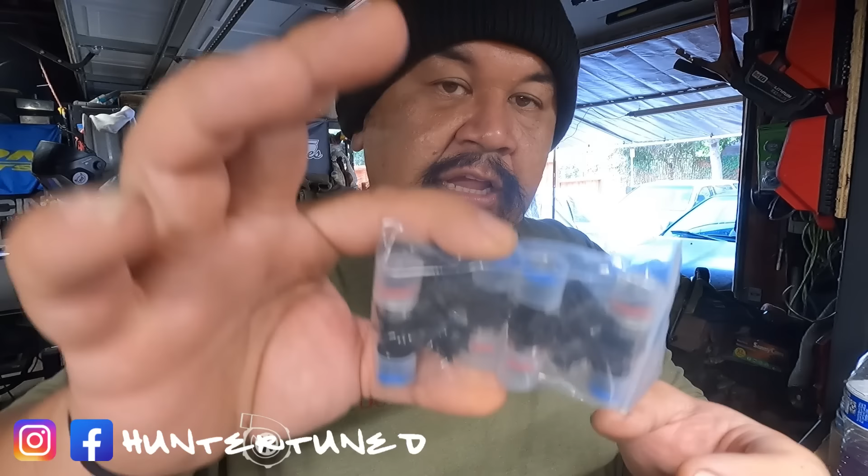Inside here we have 2 sets of injectors, for the EK Turbo Coupe and also the 88 Silver Sedan. The first set is the new mid-grade injectors, they're shorties, and Hunter also offers top hats for them, this is for the 88 Silver Sedan. Then we have the budget 1000cc injectors, which we've used before, and he also threw in the plug and play adapter kit for the harness so we don't have to hack any wiring.

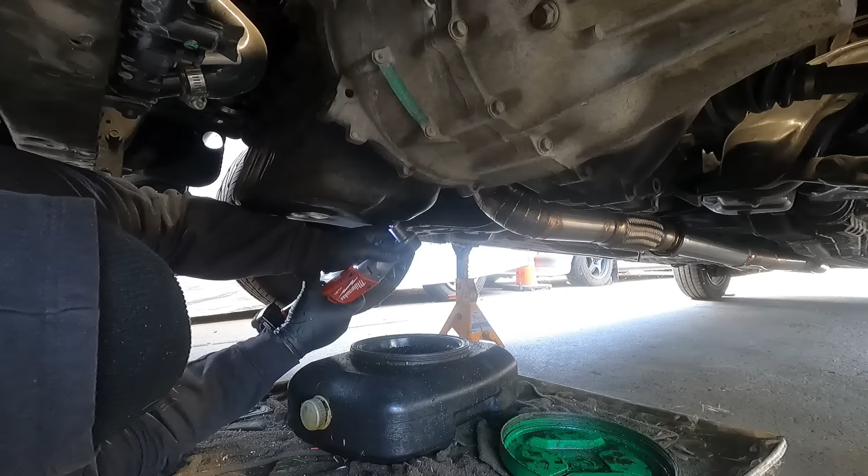Let's go ahead and jack up this car so we can get cracking. I'm going to change the oil first. I did warm up the car to heat up the oil a little so it drains easier.

Oh boy, this thing is dark.

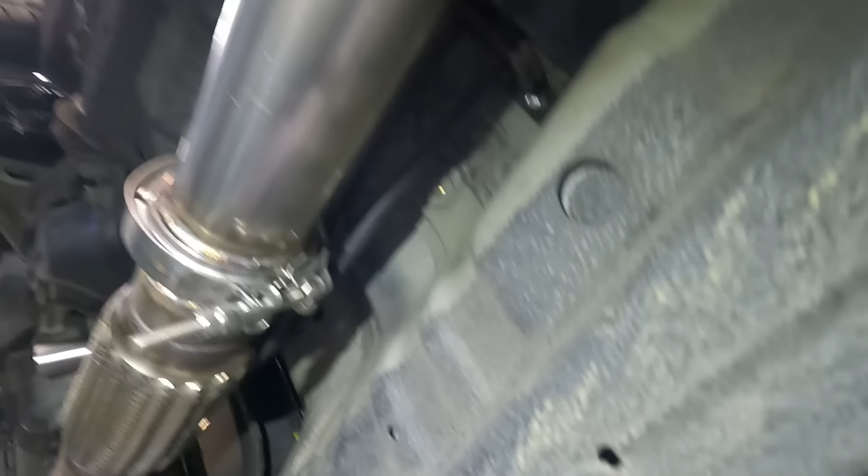Let me grab some zip ties real quick. While the oil is draining, I noticed the shift cables are pretty close to the downpipe, so I want to move them out of the way. I don't know if you guys can see it, the cables. The shifter box is mounted under the car, which brings it really low, and it sits right on top of the flex pipe. So I've got to pull that out of the way. I put a zip tie on the cable and pulled it up into the car just to hold it away from the exhaust, because there's literally no mounting points down here at all.

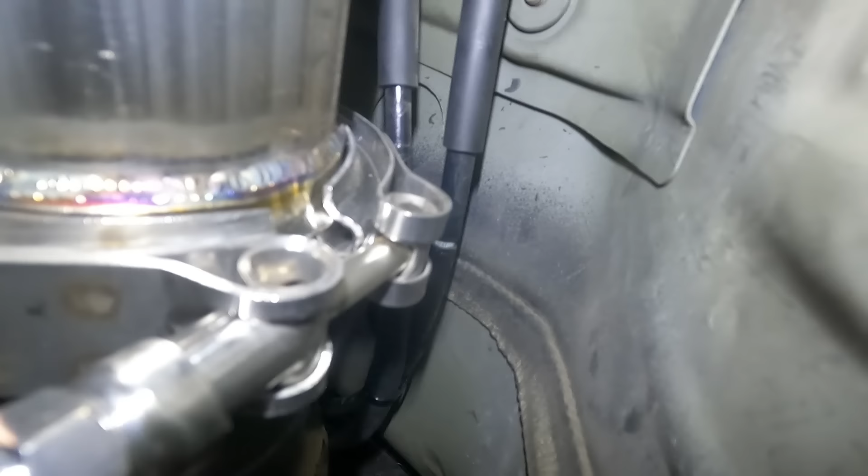Hopefully that'll work. I also noticed his cables are all broken on the sleeves. If you guys remember, when I broke my sleeves on the cable in the blue all-wheel drive car in Bakersfield, the shifts were super hyper extended.

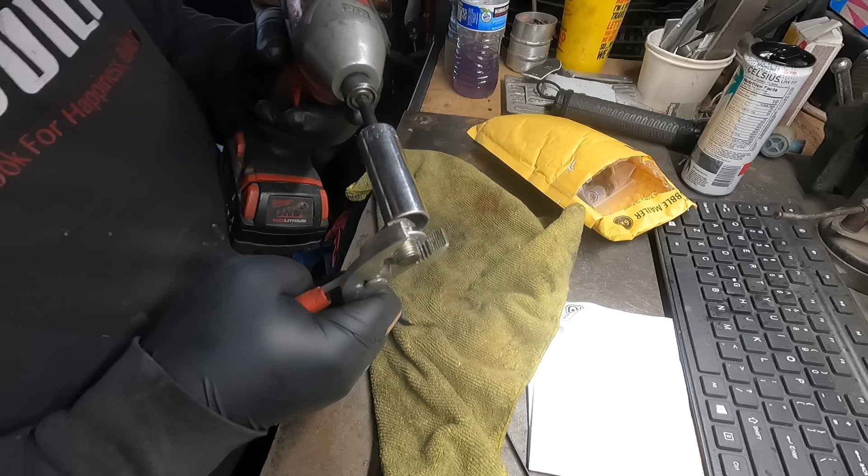Damn, this thing was shot in there or something. You guys see that bulge?

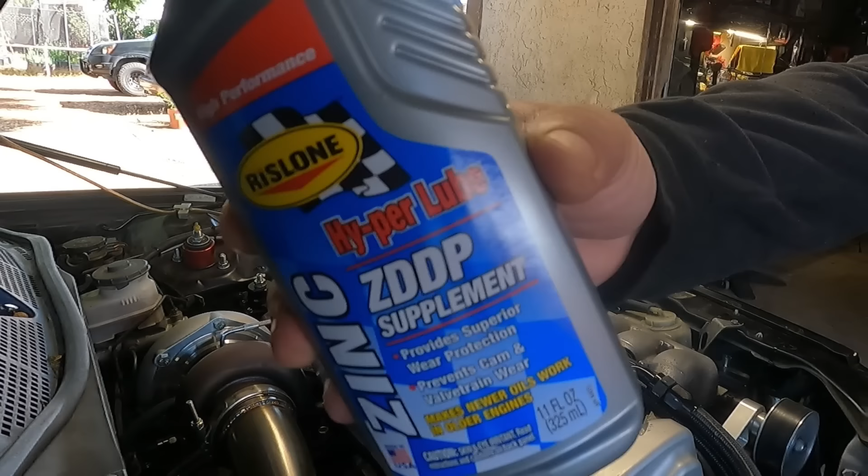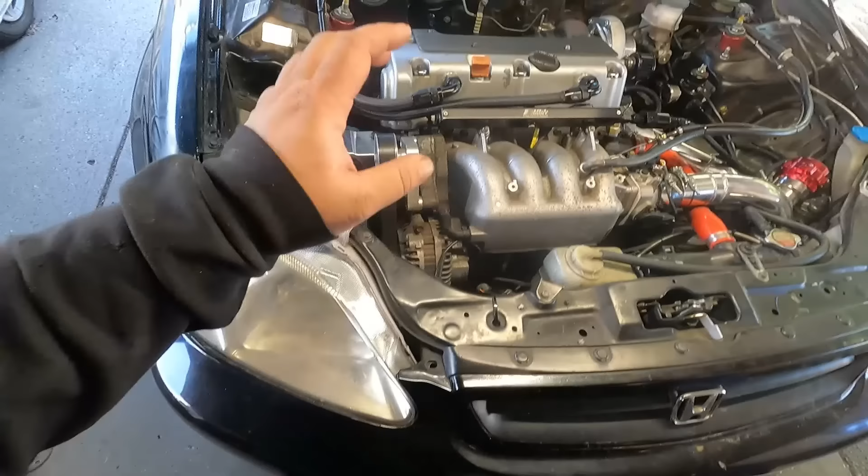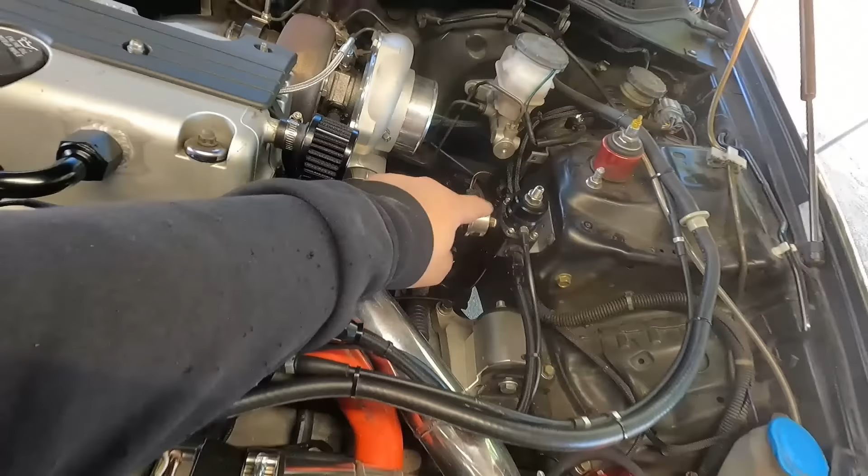New filter and oil has been changed. Before I turn on the car to cycle the oil, I'm gonna build a return line for the fuel pressure regulator, because we're gonna be draining out the 87 gas out of here, and then we're probably gonna put that into my mom's car, and then go get some fresh 91 for this car before I drive it to the dyno.

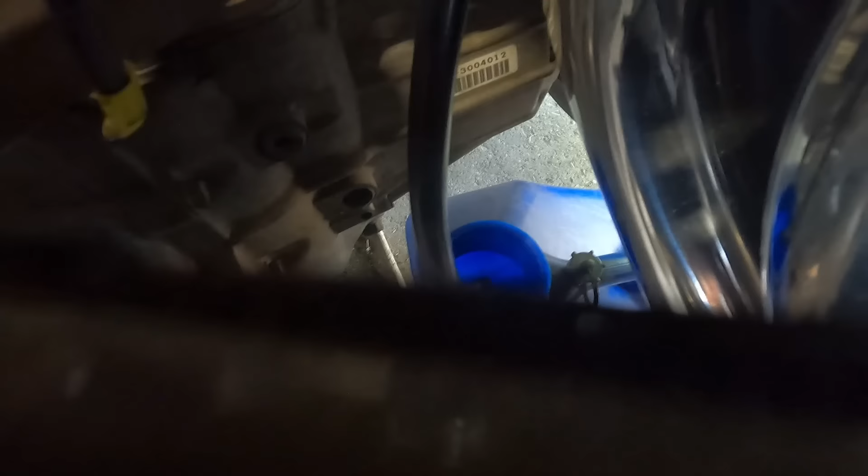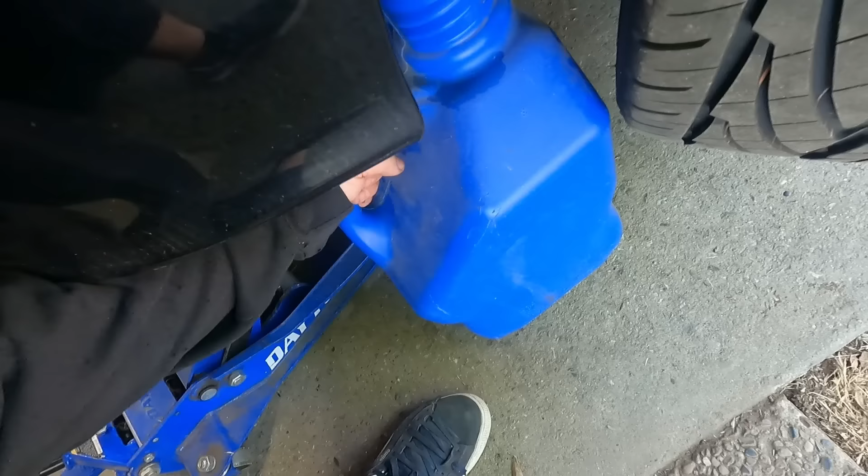All right, here is the first run. We're a little under half tank. The car just died off, and I think we're way past the E.

Cluster is about 10 miles an hour off. On the cluster, I'm doing 80, but on the Speedo app, I'm doing 70. But even at 70 miles an hour, this car is not that loud, and I'm very stoked about it. Very bearable.

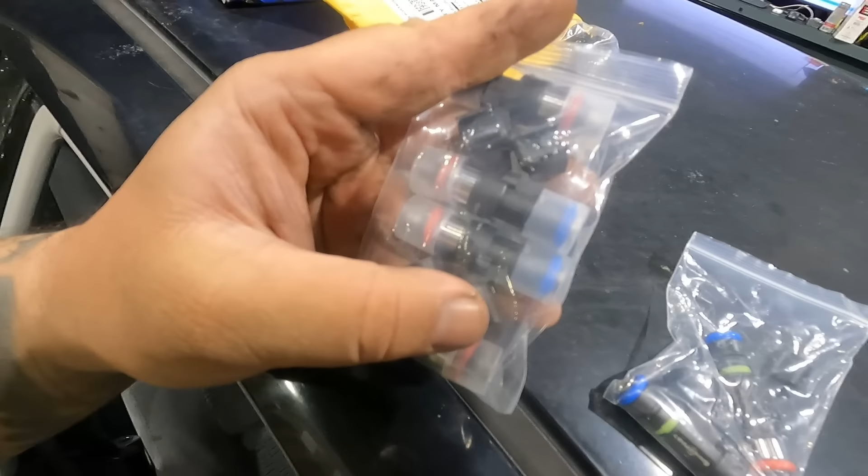So it seems like everything is within each other, and I'm gonna leave that inside the car for Guy, because he's gonna have to dial that to the map with the 4-bar map sensor. So the shorties are gonna go back into the bag with the top hats right here, and we're gonna be using these shorty adapters, which eliminate a bunch of extra wiring. These little ones just clip on top of the injectors, and the harness just plugs on top of that. So let's go ahead and get this thing installed into the fuel rail.

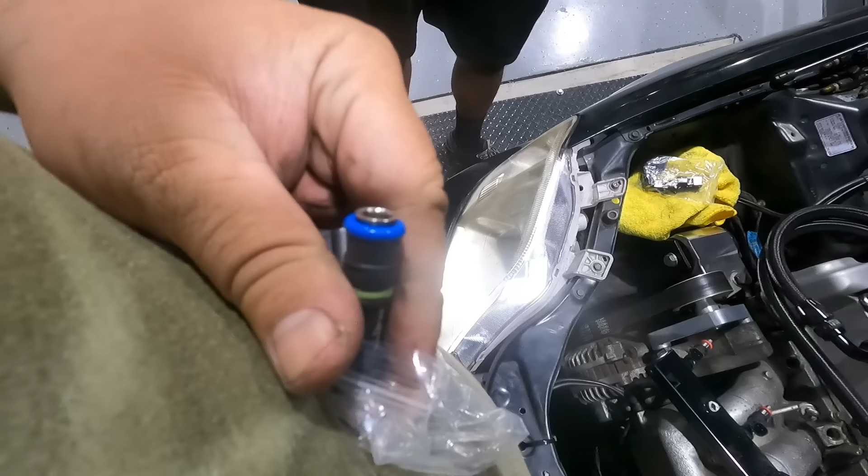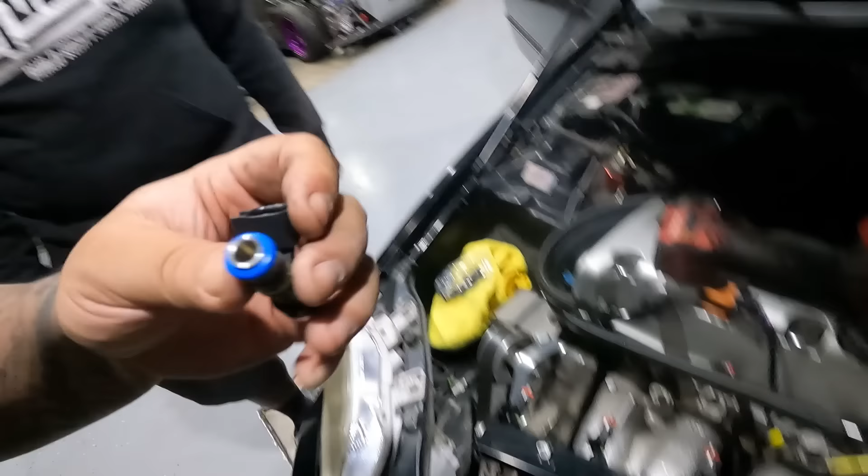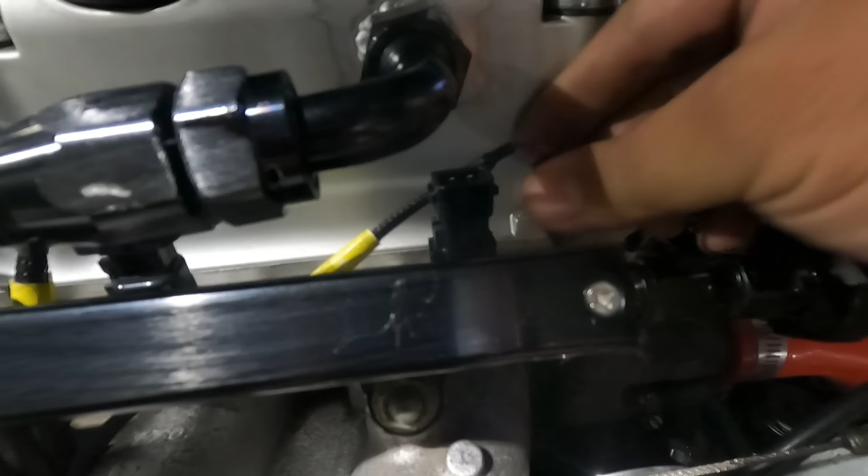So this is how you lube up these O-rings to get them onto the fuel rail, right? I can taste Hunter's fingers on these. Hunter also has these in stock on his website. Literally plug and play, right? Yes, sir.

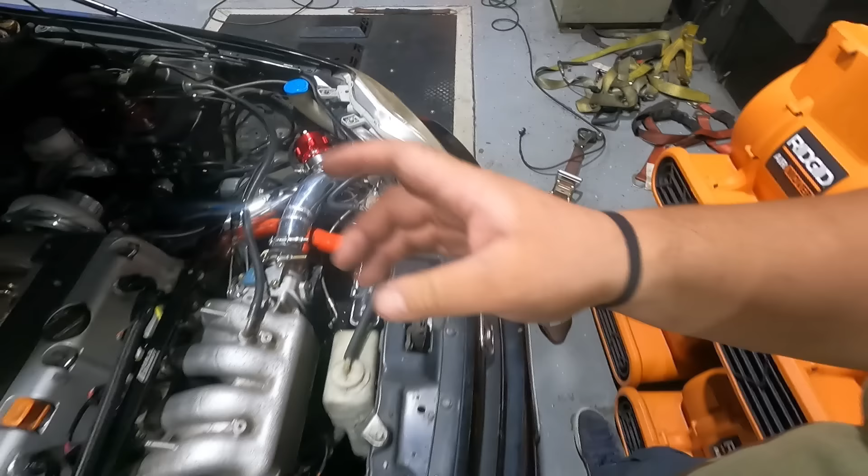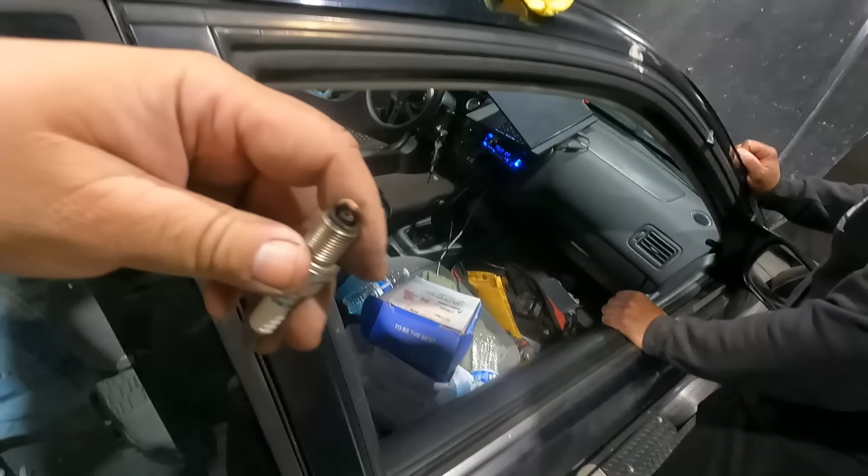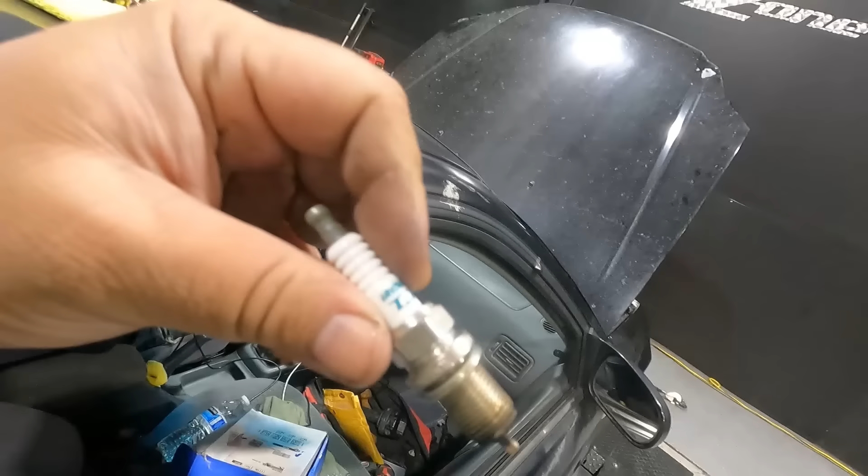So what the car was doing was, when it got into like 4,000 RPMs, around 4,200, it was doing like an AK-47 two-step sounding thing, and we were trying to figure out what was going on. The ECU wasn't data logging. There's a bunch of little stuff going on, and then we took out the spark plugs just to check it out. These aren't the plugs you're supposed to run with a turbo setup, but we just wanted to run it for the baseline pull.

So we just swapped these out to the NGK2668, got that gapped, and let's see if it changes the drivability.

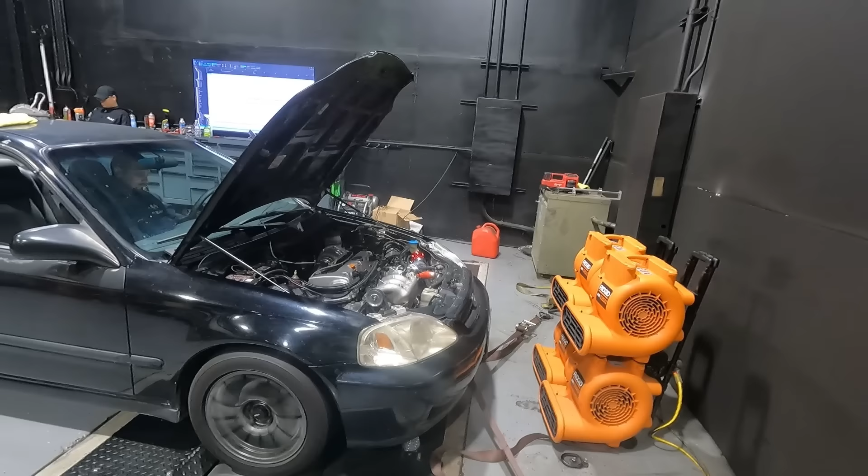So we've been trying to figure out this hiccup issue. Let me see if I can try to pick it up for you guys. Okay, it sounded a little bit better.

Earlier at around 4,200, it was doing some crazy AK-47 action. And what was going on is that the VTEC coming in, wherever the factory had it set, combined with the GT35 pulling all the air in. This is an EP3 motor with 2 lobes, so the motor is congested with a lot of air, and it was having a hard time coming out.

So Guy dropped the VTEC down to like 38, and it was finally able to rev out, but now it's starting to do that at a higher RPM. So Guy and Nomis have been trying to figure out what's going on with it and try to get this thing dialed in a little bit.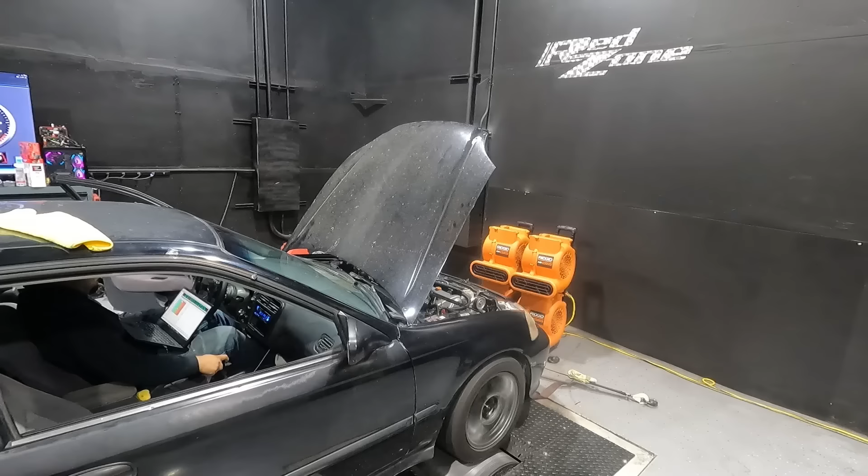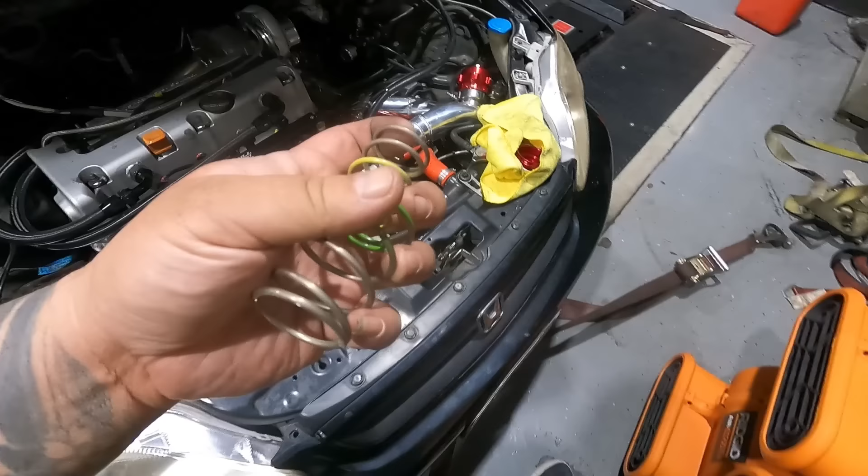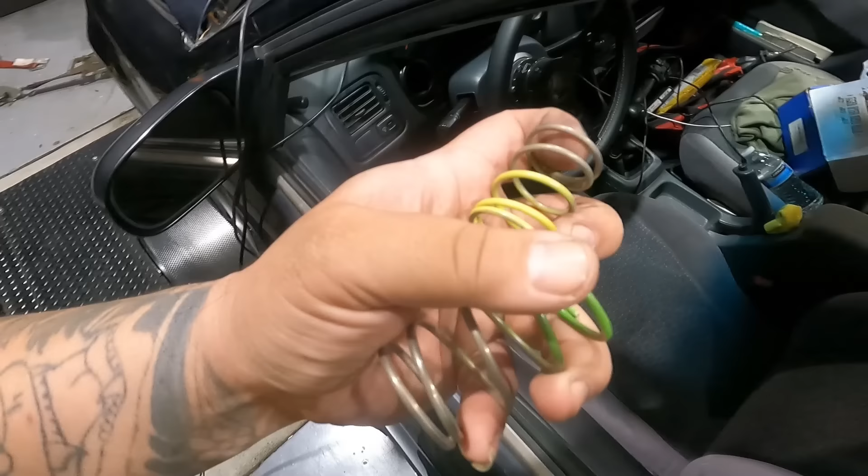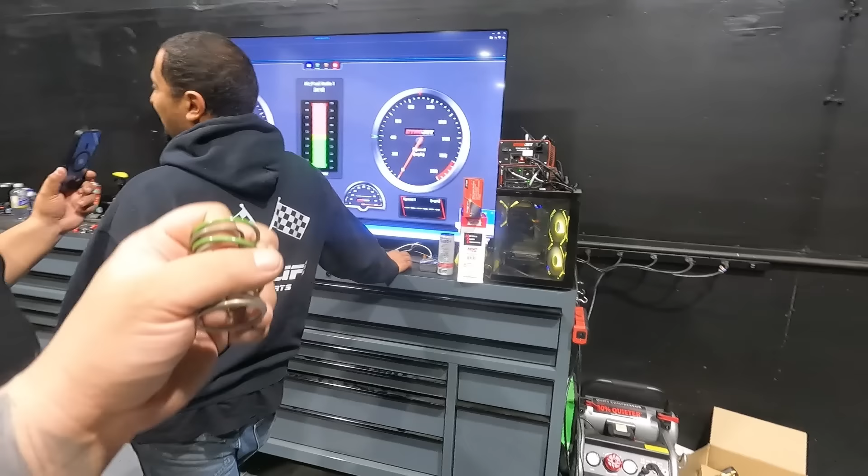The car is only making 3.7 pounds, and I had a 7-pound spring in here. What we're thinking is that the car is having some sort of back pressure issue. So Guy told me to put the second spring in it to make it the 12-pound that we originally had it at, to see if more boost can force out that back pressure, whatever the car is currently doing. It didn't make a bunch of power. It made like 187. So we're just ironing everything out right now.

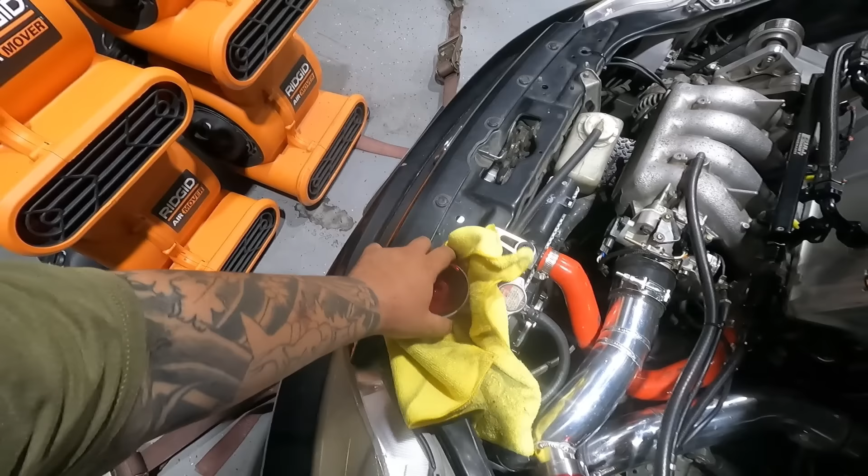So I'm gonna go ahead and put this thing back on. Shout out to Turbosmart, because it's as simple as this locking collar right here versus all the little screws like some of the other brands you guys have seen before. Right now I just need a second pair of hands to kind of push down the 12-pound to lock the sucker back on, and we should be ready to rock and roll.

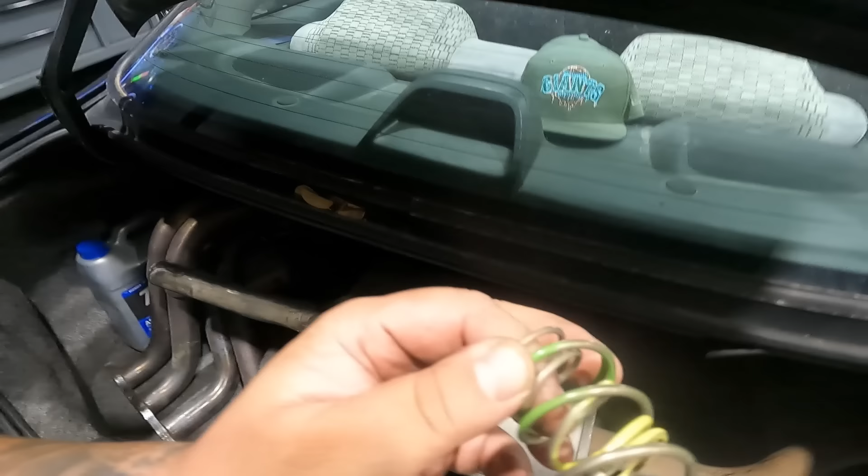Okay, we were supposed to put the 12-pound spring in it, but the box had a single blue spring which was thicker, so Guy told me to just put the blue one in it. We'll see what it does.

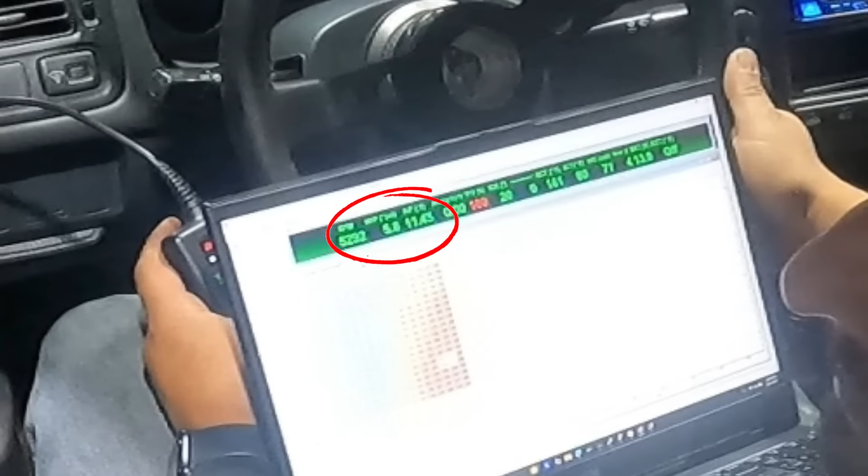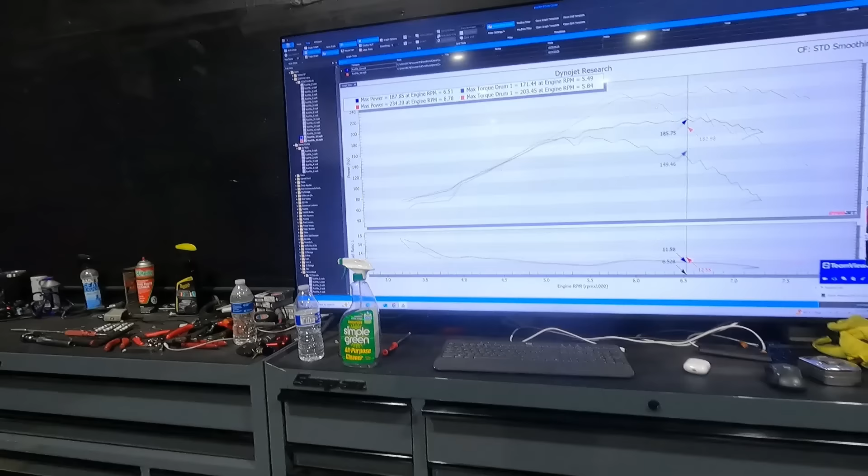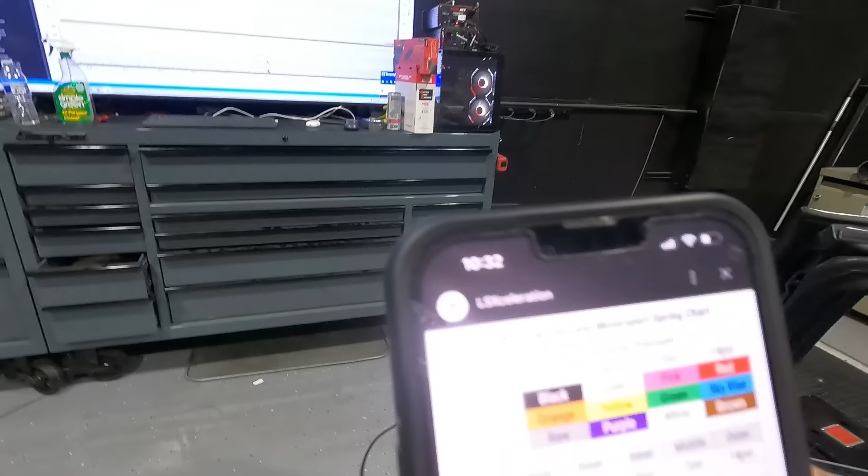Okay, so that spring did 7 pounds. It made 234. It's definitely moving somewhere, but that's odd that it only made 7 pounds. So I don't know if that's like a back pressure problem or... Look at this, guys. Sky blue spring for the HyperGate45 is 14 pound, but it only made 7. Interesting. Okay, see the squiggly line at the back right here?

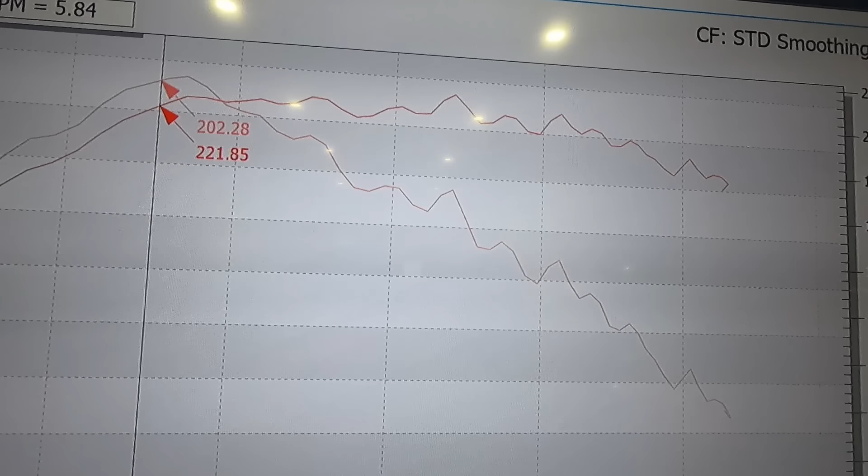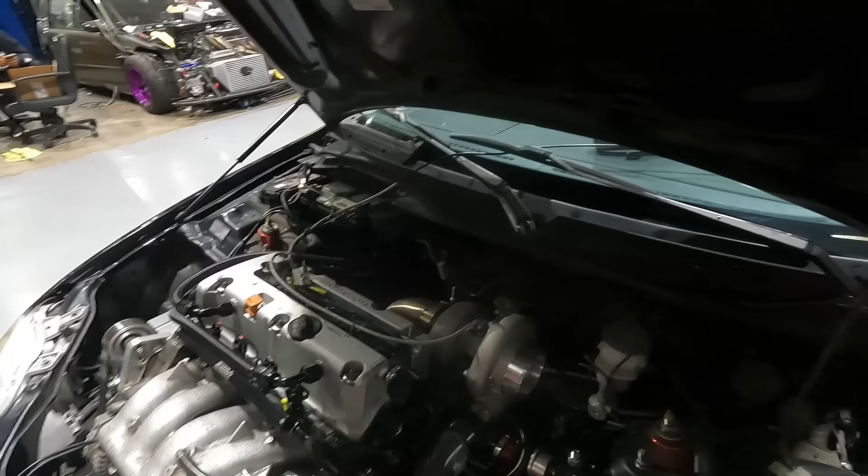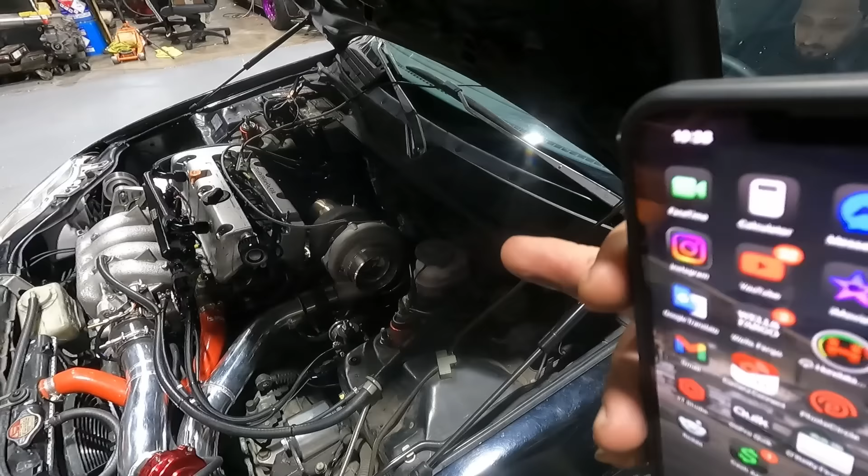We're thinking that this has something to do with possibly valve floating right here, because this is an EP3 engine that only has the 2 lobes, so it's not relieving. And we're still thinking this thing has a lot of back pressure issue, because we put a 7 pound spring in here and it only made 3.4, and then we put a 1 bar 14 pound spring, and on that pull it only made 7. So they're explaining to me the ratio of the pressure, because this manifold has wastegate priority for the turbo setup. So let me show you guys real quick.

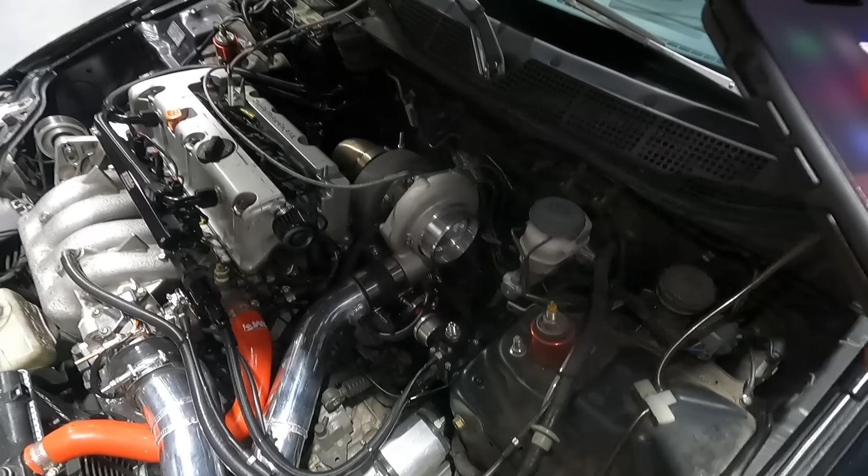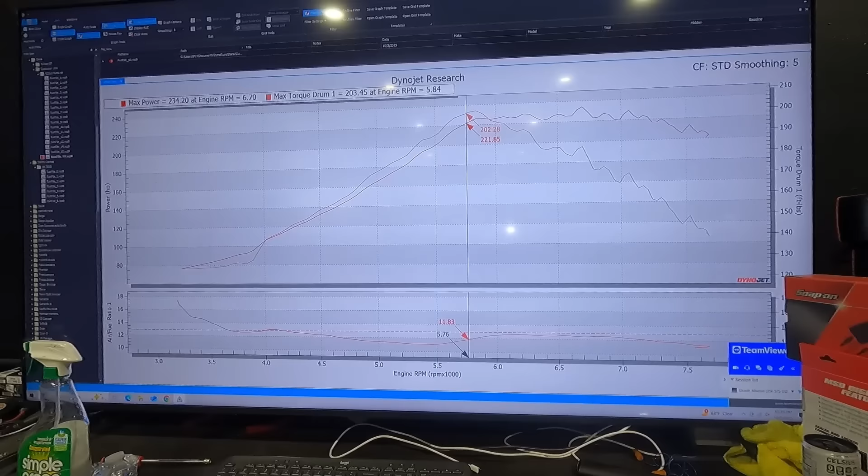So this manifold has wastegate priority. It's a log style that goes all the way across straight to the wastegate before it goes up into the turbo. We're thinking that all the pressure is going directly to the gate and opening it up before entering the turbo. That's why the 7 pound spring is doing 3, and the 14 pound is doing 7. So at 234, that's kind of where it's sitting.

He's going to mess with it a little more, see if we can squeeze a bit more out of it. But he was saying that if we want to make more, we got to double up the spring to make half of whatever combo we put into it. I don't want to go that far, because what if it spikes when it's driving on the street, and then goes into full boost or full spring.

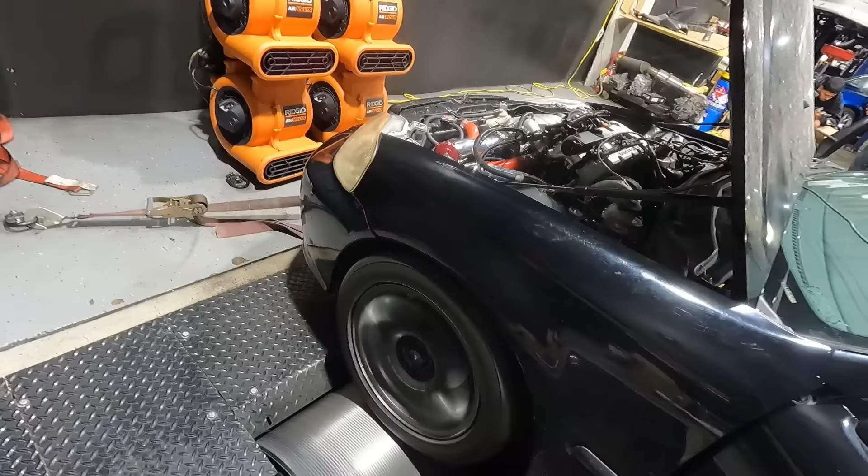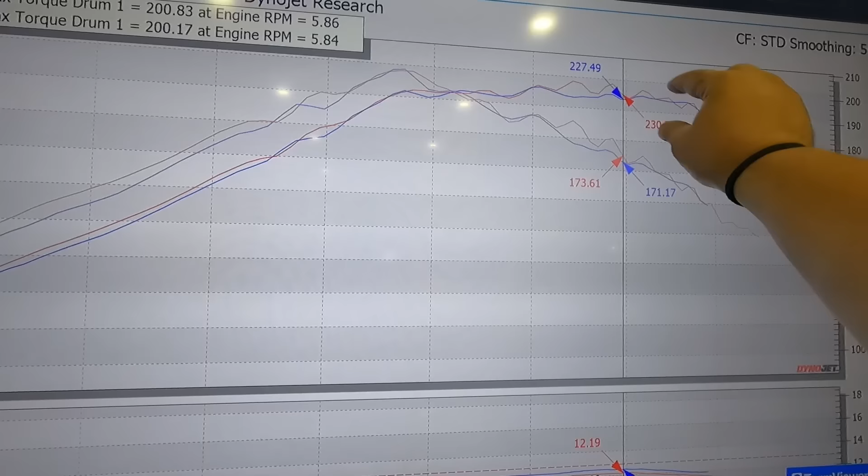Guys, I think this is an EP3 problem. This is an A3, EP3, EP3 problem. So I'm thinking that the engine mechanically having this issue is what's causing all of the boost issues we're having with that over there.

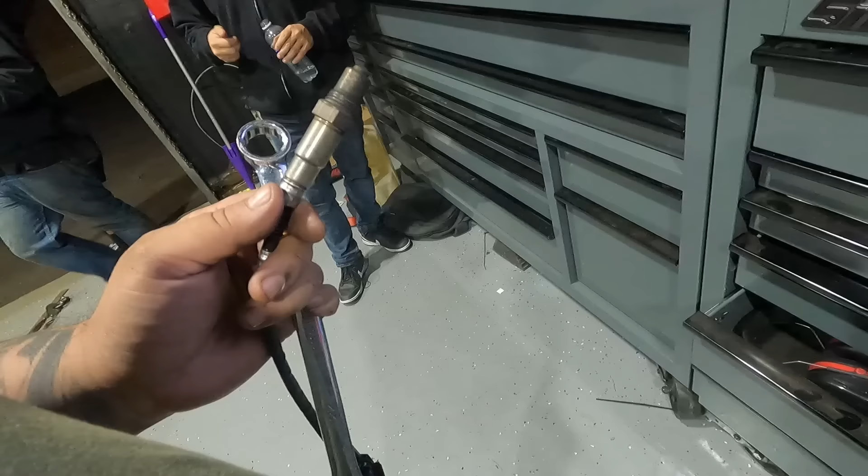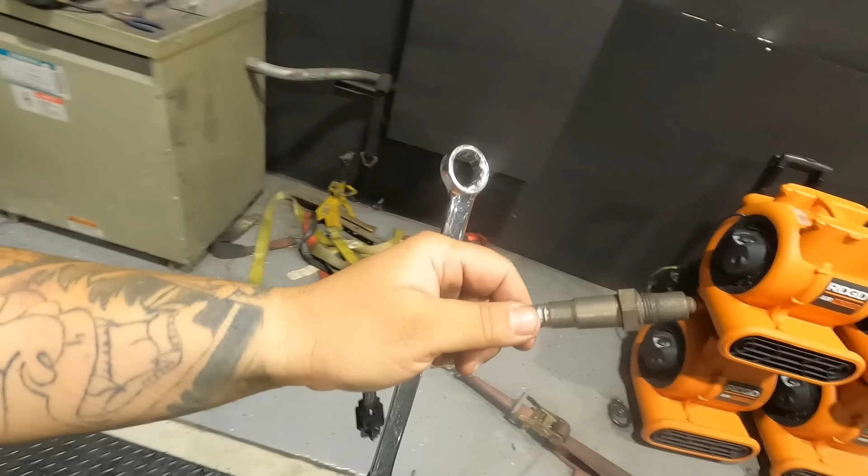Chad, this is not an A3 problem. So guys, this is where we're gonna stop it at 240, 206, and I'm gonna explain why we decided to stop it right here. K20A3 EP3, guys. So right now, before we pull this off the dyno, I'm going to switch the O2 sensor to the downpipe, and Gaith is going to do the drivability on it, and then we're going to pop it off for the next car to go up for the night.

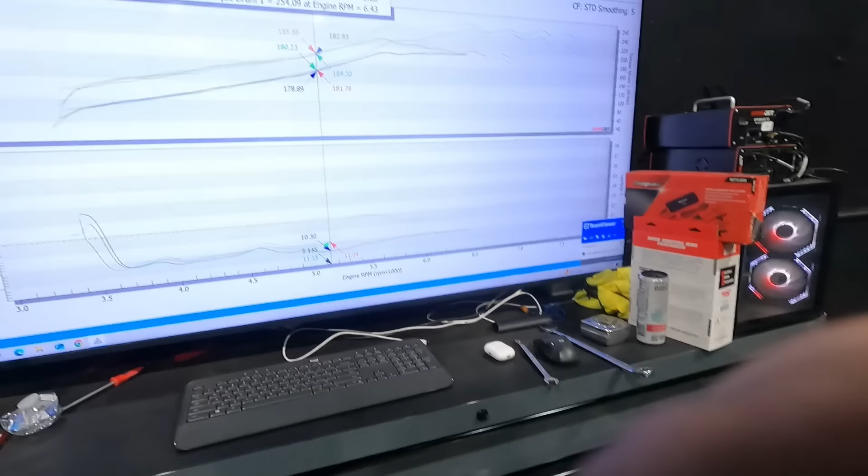I want to make sure when I leave tonight I bring my tripod with me. Gaith has been working his magic on Danny Dukes' EG hatch, dialing in the map a little bit, making adjustments. So far, 325, 254, but that's just the start of it. So I'll set up my tripod.

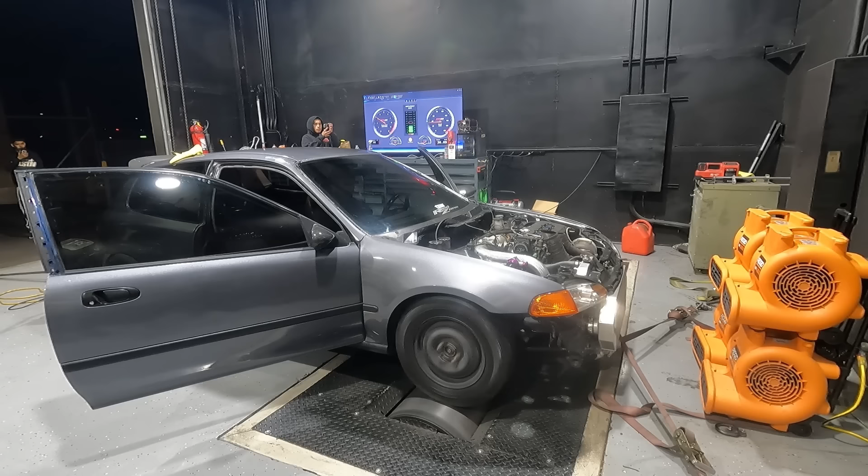That sounded good. It made... I can't read it. What was that? That pull made 366. 366.

Guys, that shit's going to the moon.

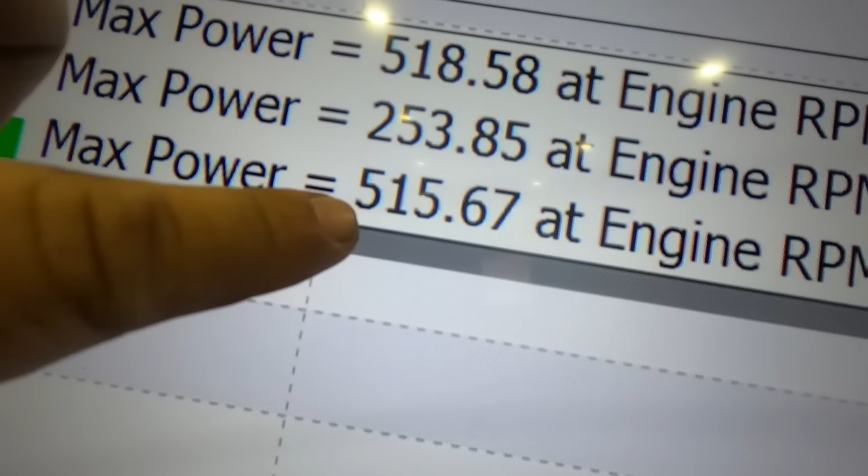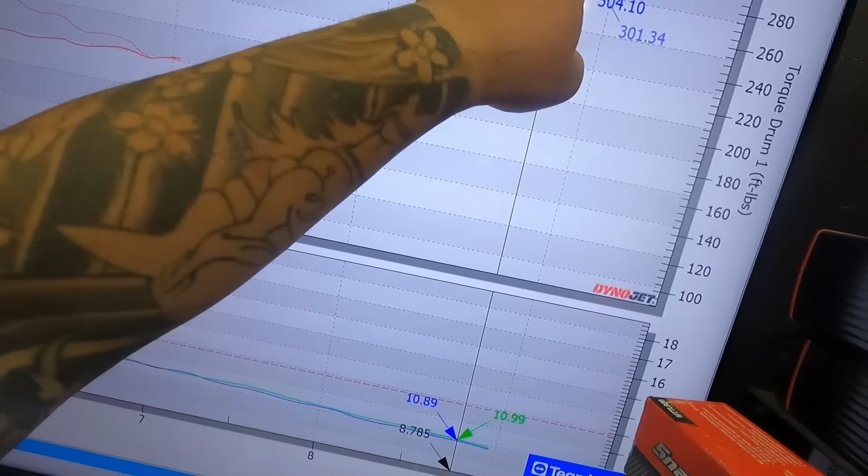Guys, I was too excited on the pull before that one, and it made 518, and then this pull just made 515. Sorry, 518. This one made 515, I don't know what I just said, but 518, 515 is what it made right now. It's going, man, it wants to go to the moon because it was standing up, but this thing has a stock dampener on it, so we're definitely keeping the RPMs down. We don't want that to go running.